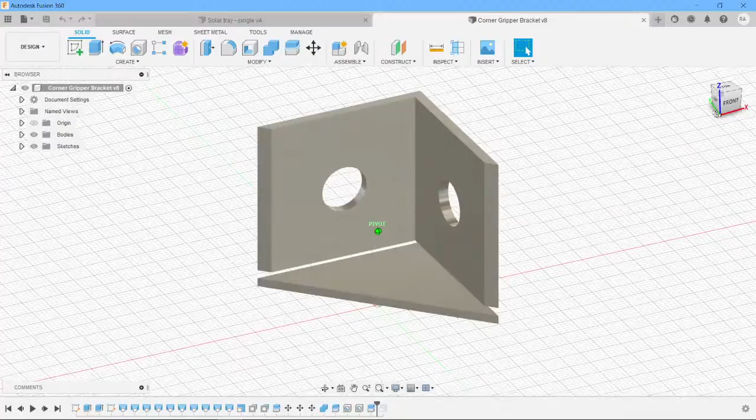All right, so I designed something in Fusion 360 which I think is quite useful. I published it on Thingiverse, and all it is is to stop an annoying thing about my cardboard boxes in the back of my boot, swilling around in the back and ending up all over the place. So I modeled this in Fusion 360 and had a bit of help from my son Simon to get these little conical pieces and everything done.

Put a couple of holes in it afterwards because originally these were just going to be loose, and I've printed some out loose without the holes in, but with the base, so that they just sort of stick under the cardboard box, but they don't attach to the cardboard box. But later on, I thought it'd be pretty cool if you could just have a couple of plugs that went through the cardboard and a couple of locking rings on the other side.

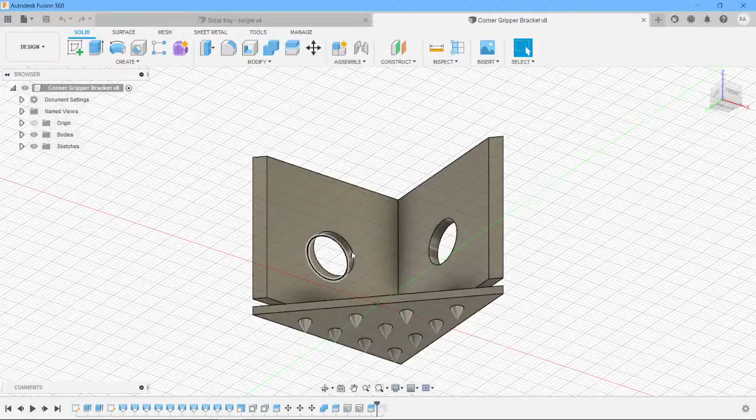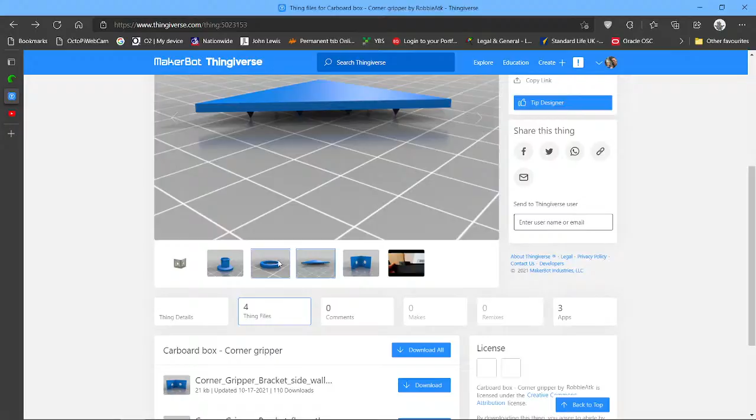So I published this up to Thingiverse, and you can see it up here, and yeah, a little plug there, a little ring, and then the floor. And it's free, so help yourself to it. If you fancy commercializing it, give me a shout. I think it could go on and be quite useful. I've got other ideas in the back of my head for things like this, more commercial minded, but I just wanted to put it out there for free and see if people actually enjoyed it.

So that's pretty much what I've been designing in Fusion 360. I'm using the new version of PrusaSlicer 2.3.3, which seems pretty good. It's got a neat feature in here called Paint on Supports, and the other one which is seam painting. It's worth playing with these. They're pretty straightforward what they go and do. The seam painting one basically distributes the seam rather than leaving it down one edge, especially where you're doing circular stuff.

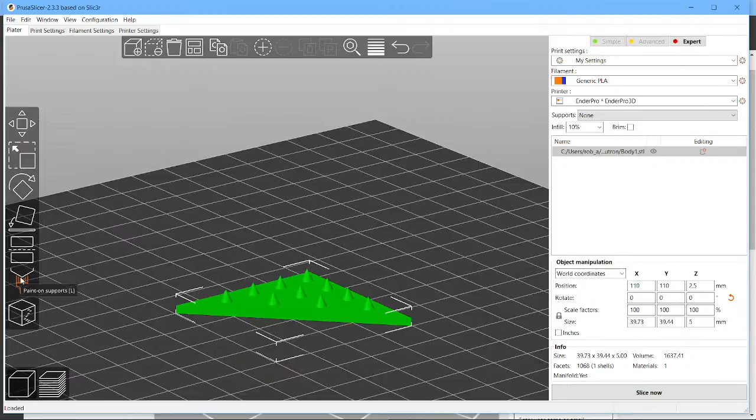And this one you can just point it anywhere you like, and it'll build a structure for you, effectively support structure where you point. And it's got a kind of painter on it, so you can actually say, I want to paint here, I want to paint there, wherever it is you want to paint. Obviously, this one I wouldn't, because it's already on the floor, and I don't need a brim for it, so it's pretty straightforward.

So there's some cool stuff in the new version of Slicer from Prusa. I don't use it too much. I haven't tested it with thin wall printing yet, so maybe that's in there now.